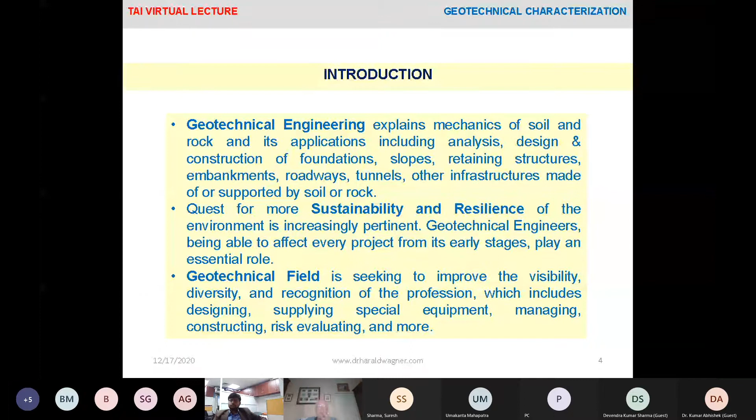The next slide shows some design methods of both soil and rock. There's a table, and I think it doesn't make a lot of sense to go through this table in detail, so I would like to ask you to look into it, as this table gives examples from different methods. In particular, we are talking about empirical methods, closed form analytical methods, and numerical methods. This gives an overview of the effect of time, the effect of groundwater, and the effect of the shape of the tunnel, whether it's a mined tunnel, meaning conventionally excavated, or a tunnel boring machine method tunnel.

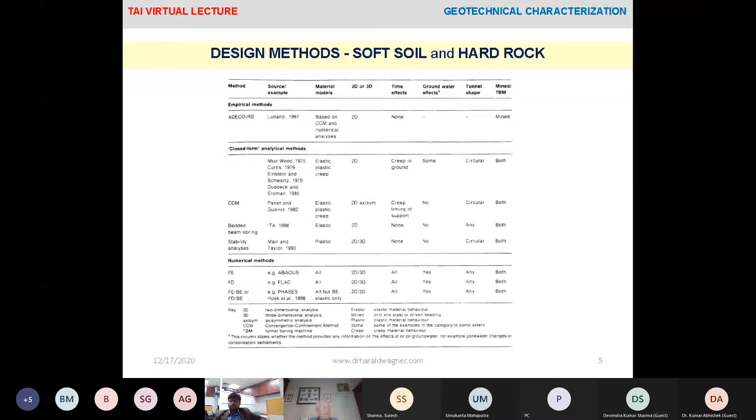After design methods, we will look more at this year's classification of intact rock. Very easy, and very easy to remember, the classification starts with very soft rock, and goes through soft rock and medium to hard rock, to very hard rock, to extremely hard rock. We look at what kind of testing is used, and the range of compressive strengths. We will talk more about compressive strengths, in particular unconfined and uniaxial compressive strengths. This gives a range of compressive strength for these different classified rocks, which starts for the very soft rock with a strength between 1 and 3 megapascal, and then goes up to the extremely hard rock, which is a compressive strength range beyond 200 megapascal.

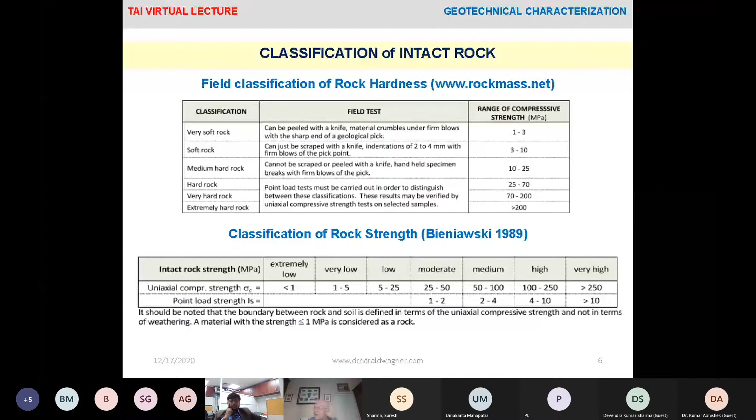The next slide shows the context between intact rock and rock mass properties, where intact rock properties are determined from laboratory tests with regard to porosity, unit weight, specific gravity, water content, durability, abrasion resistance. You maybe remember the Brazilian tests also, for strength and deformability, and rock permeability.

While the rock mass properties are determined in situ. The rock mass property - I cannot see that again, okay. Mr. Uta, maybe you can delete that, but let's just go on.

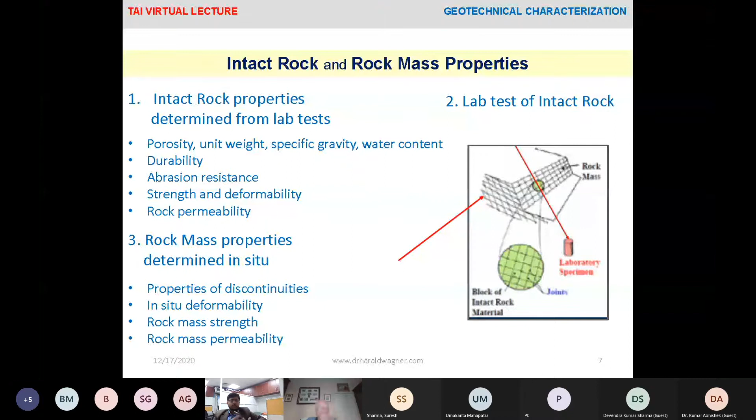The rock mass properties are determined in situ with regard to the properties of discontinuities, the deformability, the rock mass strength, and the rock mass permeability. The sketch shows what kind of laboratory tests we should do when we have intact rock.

So, rock forming minerals and the context of those minerals to the properties. We are looking into minerals such as orthoclase feldspar and plagioclase feldspar, quartz, muscovite, olivine, and so on.

We look at the hardness according to the Mohs scale, which is about 6 for feldspar, and for instance only 2.5 for muscovite. We also look at the fracture behavior: there is good cleavage at right angles for orthoclase feldspar, and nearly at right angles for plagioclase feldspar. For quartz, it is about the same range, but the structure is different - quartz has a hexagonal structure, plagioclase feldspar has a triclinic structure showing distinct cleavage lamellae, and orthoclase feldspar is monoclinic, commonly occurring as crystals.

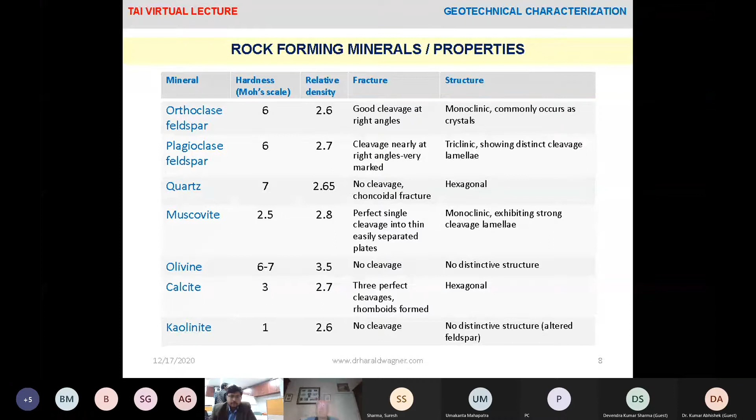So we are talking right now about the physical properties of intact rock. Why is this physical property so important? First of all, because it's an indicator of rock and rock mass behavior. These physical properties are used in the classification and engineering of geologic conditions, and to estimate the mechanical properties by empirical relationship.

We are using the stress state to predict changes in strength and deformability during saturation or drying, as well as freeze-thaw processes. Freeze-thaw occurs in the northern part of India, so we have to look into that different behavior of the properties.

This is responsible for many rock engineering hazards, such as landslides, collapses due to karstic conditions, subsidence, and so on. All that is very important with regard to the properties of the rock.

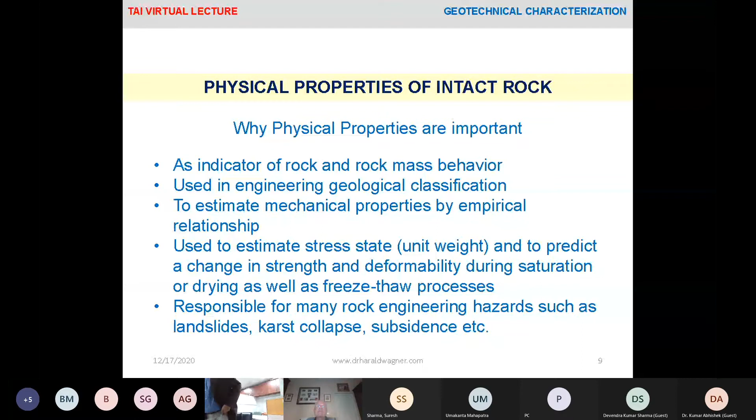Yes, the next slide is on different types of rocks, which we have just been talking about. We have igneous rocks, metamorphic rocks, and sedimentary rocks. This slide shows what kind of rock we have for igneous, metamorphic, and sedimentary. You can also see pictures on the left and right side with samples of these types of rocks.

Also, there is some indication on the unit weight and on the porosity of that rock, which is quite illustrative.

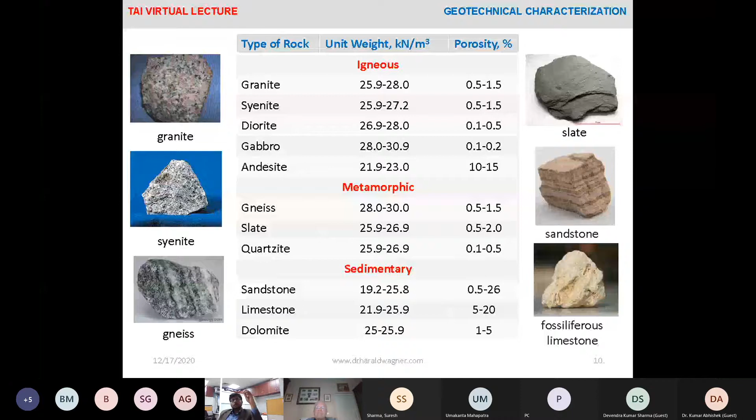Yes, mechanical properties of rock. We are looking into the safety and serviceability of engineering structures, which depend on the stability of the rock foundation or the rock surrounding environment. The rock properties are important for design of engineering structures, including calculations of bearing capacity.

What kind of properties are we looking at? As I mentioned before, we are looking primarily at the uniaxial compressive strength, or unconfined compression strength. We are looking at the triaxial compressive strength, which is more related to soil mechanics than rock mechanics. We do it less in rocks, but more in soils. We are looking at tensile strength, which is quite low. I will show you examples of that on one of the following slides.

We are looking into shear strength, and into the Young's modulus as well as the Poisson ratio. I will give an explanation of what Poisson ratio basically means. We have a lot of influence from Poisson ratios in finite element analysis, which we usually do.

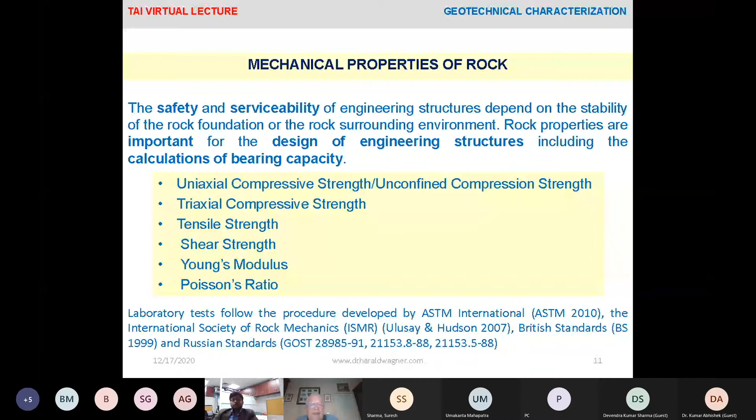The next slide shows that rock, in particular intact rock, is subject to three primary types of stress. One is compressive strength, the other is shear strength, and the next is tensile strength.

Compressive stress decreases the volume of the rock by forces acting inward and directly opposite to each other, while shear stress is caused by two equal forces acting in opposite directions. This is the example of how shear strength is acting, and this is the example of how compressive strength is acting and how tension is acting.

Tensile forces tend to pull a substance apart by outward acting equal opposing forces. So, the strength of intact rock depends on component mineral strengths, and they are bound together by interlocking or even by cementation. Rock failure is generally a shear failure.

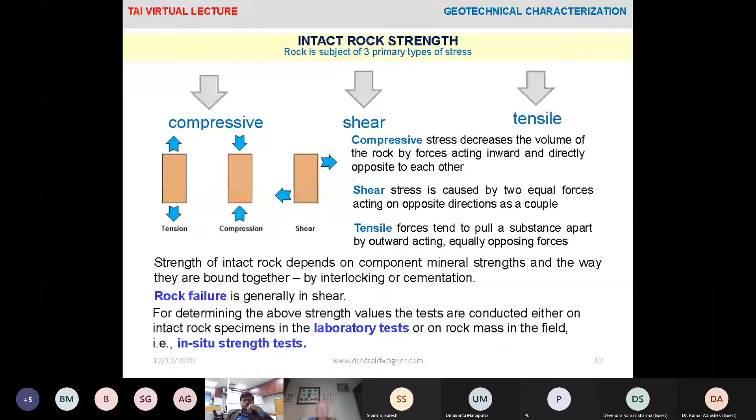The next slide gives more detailed information on the uniaxial compressive strength, or unconfined compression strength. Unconfined compression strength, QU, in short UCS, is strength under uniaxial load in an unconfined state. Unconfined compressive strength of dry rock is standard for defining rock strength. Unconfined compressive strength of saturated rock is lower than that of dry rock.

The slide also gives examples of unconfined compressive strengths, starting with very strong rock, going through all stages from very strong to moderately strong and so on, until very soft soil, giving some indication of the unconfined compressive strength in megapascals for each of these different rock or soil descriptions.

On the right side, you can see a diagram of strength and deformability of igneous rocks according to Deere and Miller from literature in 1966. In 1976 or about that, I worked with Don Deere in the United States on the Washington Metro, just as a side comment.

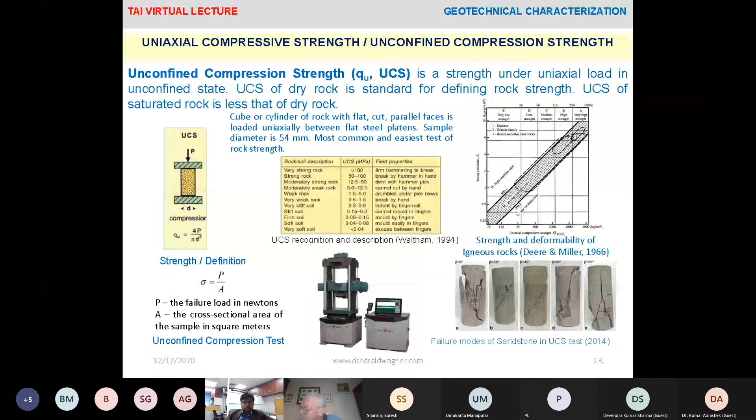The next slide gives, according to Deere and Miller, the engineering classification of intact rock in classes from A, B, C, D, E, from very high to very low level of strength, whereas the unconfined compressive strength in megapascal for the very high is above 200 or 220 megapascal, and it decreases down to the very low level, about 10% of the very high, or 20. This is an indication of 27.5 megapascal.

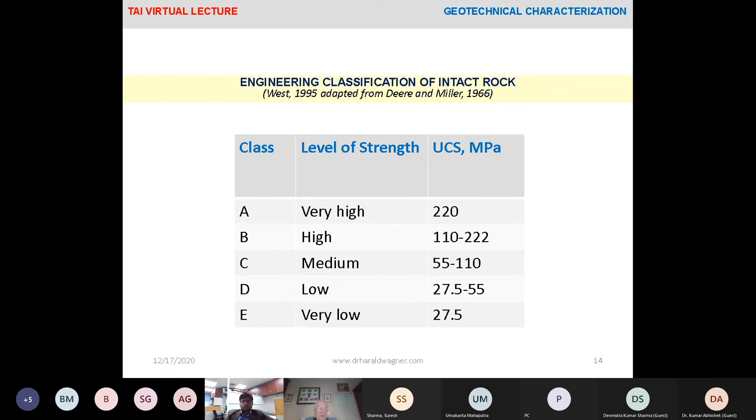Okay, we can go to the next slide, please. Slide number 15. So the triaxial compressive strength is measured when the rock sample is confined, rock sample or soil sample.

The strength increases with an increase in confining stress, and the strength is rarely measured in rocks, but more important for soil. As I mentioned before, rock strength greatly increases when it's confined underground. When unconfined, it decreases immediately. Confined triaxial strength is rarely measured in rock, as it is more common and more important in soils.

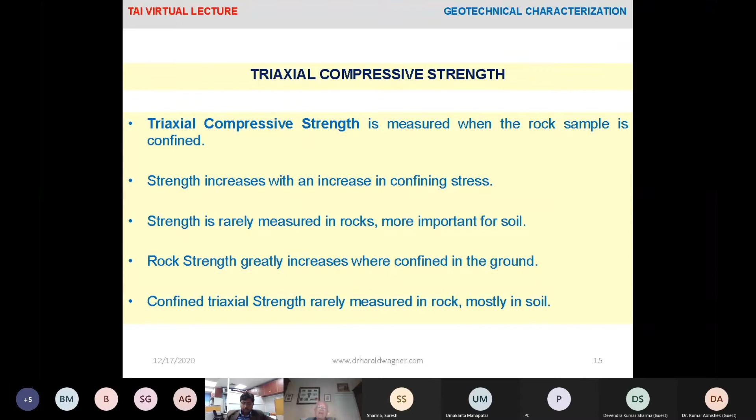Can go to the next slide, please. Slide number 16, yes. So we've all learned, either in university or later in daily practice, what the Mohr diagram is and what it means, particularly for rock. The Mohr diagram is a shear stress versus normal stress diagram, used to determine the strength and the failure relationship.

Triaxial compression tests are performed on rock samples to determine how the rock will behave under different confining pressures. So the intact rock shows shear strength at zero normal stress, called cohesion. A cohesion-less discontinuity is shown in fault zones, and it does not show any shear strength at zero normal stress, or no cohesion.

If you look at the diagram, on the left side you can see the sample with the sigma 3 and sigma 1 stresses, vertical and horizontal. Here you also have the Mohr circle, sigma 1 and sigma 3, and this is the uniaxial compressive strength. If we have the triaxial compressive strength, we can also get the failure criteria by drawing the line as a tangent between A and B, giving us the cohesion.

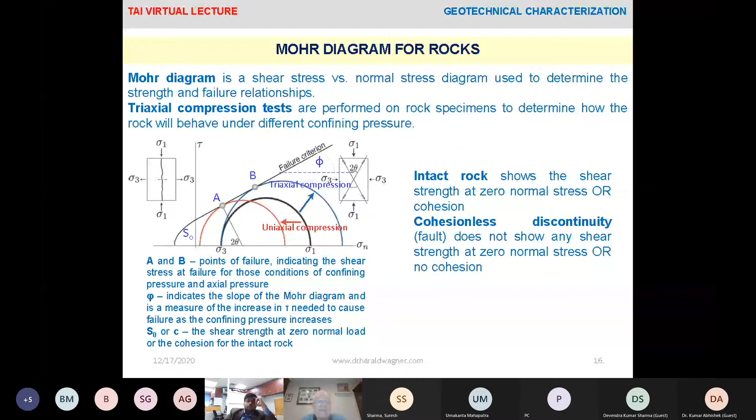So this shows the indication of vertical and horizontal stresses. Just let me put on my light in my office. Okay, so this explains the Mohr diagram for rocks, and we can go to the next slide, number 17.

Number 17 explains the tensile strength of rock, which is very low. The tensile strength is rarely measured or applied directly. Tensile strength of rock is generally about unconfined compressive strength between 20 and 8.

The sample also shows the so-called Brazilian test. The Brazilian test for rock stability—the tensile strength is not as significant a parameter as the unconfined compressive strength, but it is still done in practical geotechnical baseline reports. You can always find indications for the Brazilian tests, and it gives some parameters.

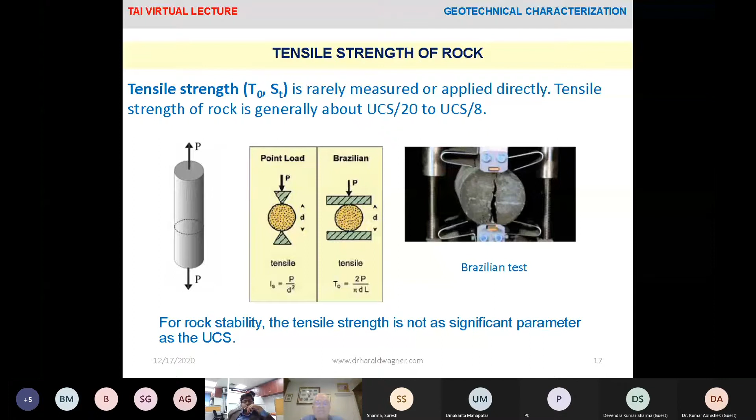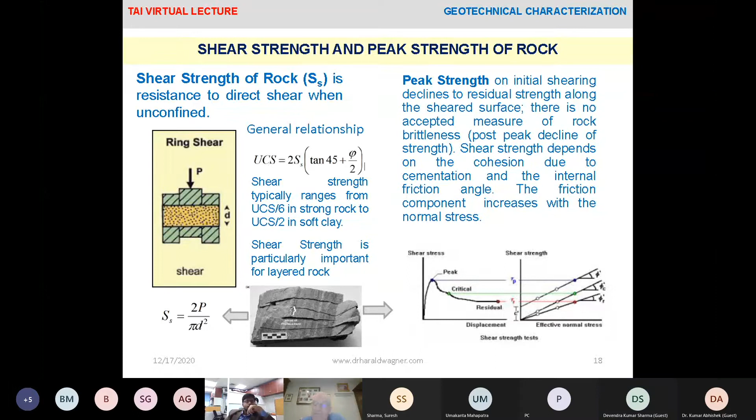So the shear strength is particularly important for layered rock. We also have two examples on the right side, two diagrams for shear stress and shear strength, and the relation between these strength measurements. Next slide, please.

Slide number 19 explains rock mass characterization, which is the subject of today's presentation. The rock mass is a matrix consisting of rock material and rock discontinuities, characterized and classified to determine the rock mass characteristics by assigning values to a set of rock parameters.

This makes rock mass and rock mass matrix really challenging, because the rock itself does not determine the condition much—it is more determined by the discontinuities. The behavior of intact rock material is determined by continuum mechanics, whereas rock masses are highly fractured. Fractures control the mechanical response of rock masses, making determination of mechanical behavior difficult, and so dependent on experience and on specialists or rock mechanics experts.

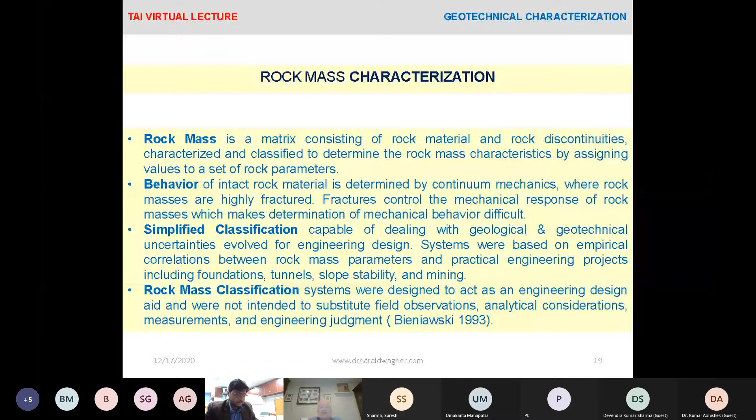Slide number 20 deals with parameters for rock mass classifications. The overall behavior of rock mass, both engineering properties of rock material and the fractures, should be derived considering the following parameters. These are significant parameters used in classification systems, whatever the classification system may be, because we have several classification systems.

These parameters relate to the strength and deformability of intact rock. They also relate to the rock quality designation, or RQD, considering the intensity of fracturing in a drill core. We have to make a drill core and then we can derive a rock quality designation. The rock fracture parameters also relate to spacing, orientation, width of the fractures, roughness, weathering conditions, and so on.

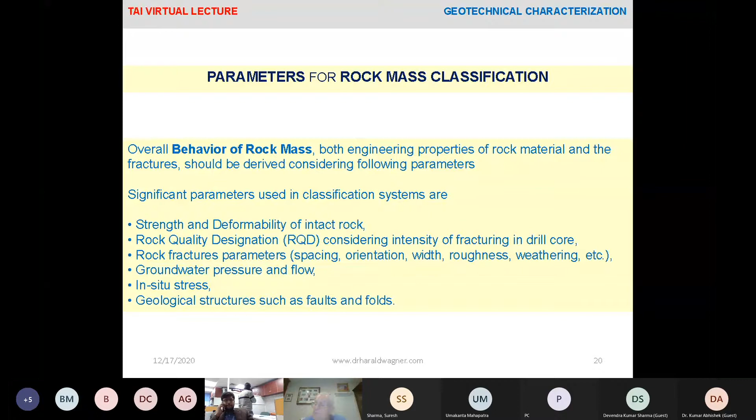But other significant parameters relate to groundwater, groundwater pressure, and groundwater flow, as well as in situ stress and geological structures, in particular with regard to geological fault zones and folds and the like. So the next slide, please.

Slide number 21. With regard to rock mass classifications, we have to look into what kind of rock mass classifications assist us when we design infrastructure, any kind of underground infrastructure.

The rock load classification evaluates the impact of rock load, for instance on steel-supported tunnels, based on a descriptive classification of rock classes, developed by Terzaghi, one of the very early classifications in 1946. So we look into the time immediately after the Second World War. Terzaghi was lecturing as a teacher at the Massachusetts Institute of Technology, MIT, in Boston, Massachusetts. He was the one who did the first classification with regard to what was common technology at that time in the United States, which was tunnels supported by steel arches. With that regard, Terzaghi made a classification system.

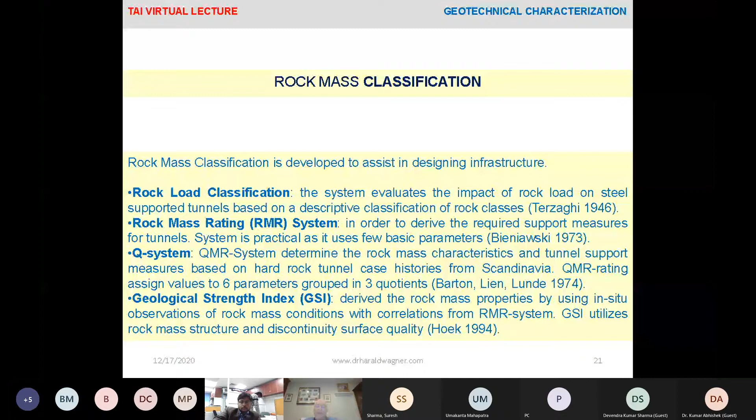And then we have the GSI, or Geological Strength Index, which derived the rock mass properties by using in situ observations of rock mass conditions with correlations from the RMR system of Bieniawski. GSI utilizes rock mass structure and discontinuity surface quality, and this was further developed from Bieniawski by Evert Hoek in 1994. I've been working with Evert Hoek in Turkey in 2005, I believe, 2005, 2006.

Let's talk a little bit about engineering properties and unconfined compressive strength, or UCS. UCS is known as uniaxial compressive strength, and this is the maximum stress a rock sample can carry under uniaxial or unconfined compression. It is conducted on a prepared cylindrical rock sample with dimensions of length equal to 2 times the diameter.

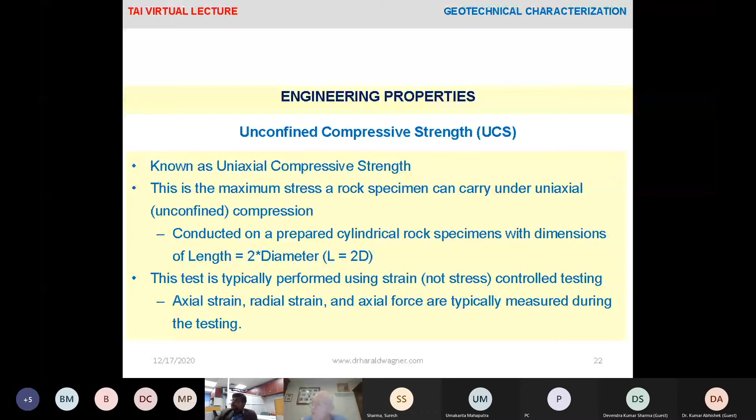The test is typically performed using strain, not stress, controlled testing. Axial strain, radial strain, and axial force are typically measured during the testing. We have seen that testing apparatus in one of the slides before. Let's go to slide number 23. Yes, slide number 23.

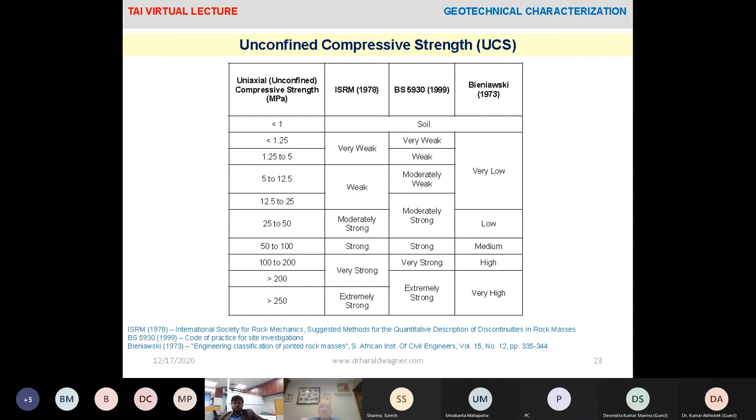And we have the African Institute of Engineers, who published something in 1973 also, I believe. Okay, so we can go to the next slide, slide number 24, please.

Rock has a history, yes, but what is the history of it? It is the history of a building material. There are numerous examples of ancient people building into rock, for example temples like the Kailasanath temple, tombs such as the Lycian rock tombs, and natural excavations in Cappadocia in central Turkey. There are also quarries, quarrying rock for structures and megalithic structures, for instance the ancient pyramids in Egypt, a very famous example, but also Stonehenge in the United Kingdom, and Tiwanaku in South America.

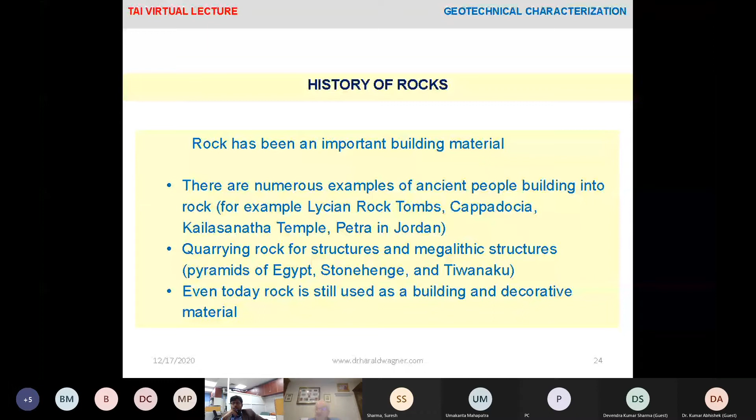So even today, rock is still used as a building and decorative material, sometimes only as a facade. So we go to the next slide, slide number 25.

We have different types and formation of rocks. In particular, we have intrusive igneous rocks and extrusive igneous rocks. Intrusive igneous rock comes from molten rock, also sometimes called magma, which is cooled down and crystallized within the earth. Extrusive rock, also molten, its origin is called lava, and it is cooled and crystallized on the surface of the earth. A common intrusive igneous rock type is granite, and extrusive igneous rock type is called basalt.

So please switch to the next slide. In more detail, metamorphic rock is formed from other rocks by essentially solid state changes in mineralogy and/or texture, as a result of a change in chemical or physical environment. Different temperature and pressure influence that. The common metamorphic rock types are slate, schist, and gneiss.

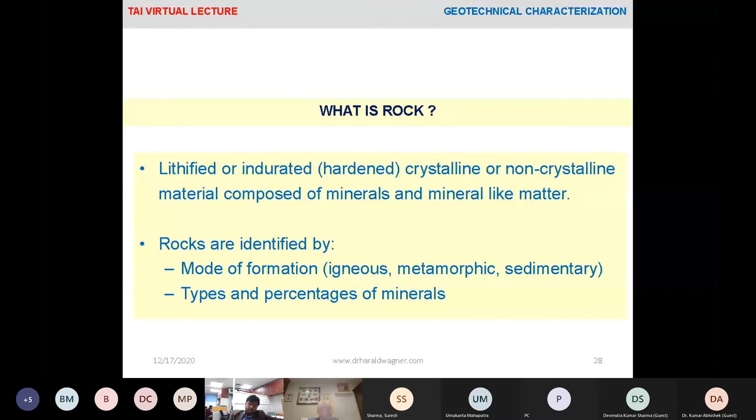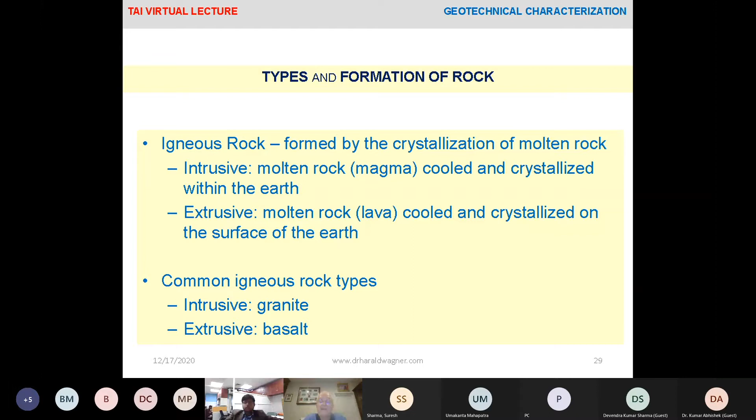Types and formation of rock, intrusive and extrusive rock. We have been talking about crystallization of molten rock and the different types of intrusive and extrusive rock, magma and lava cooled down. We have been touching on this issue already. I think that is fine. We can go to the next slide, number 30.

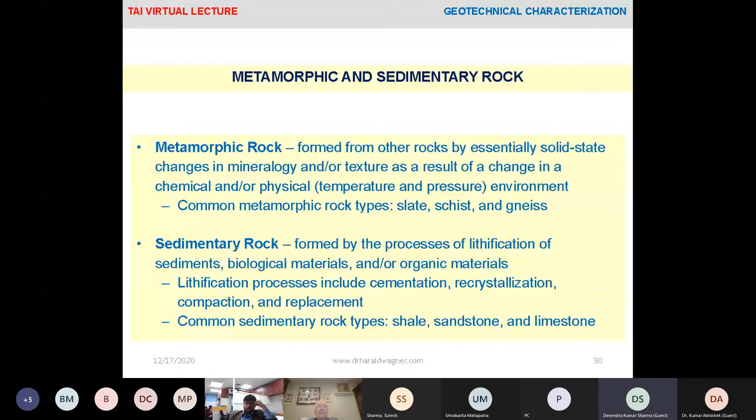Next slide, please, 31. I think there was some confusion. 31. I'm trying to follow up.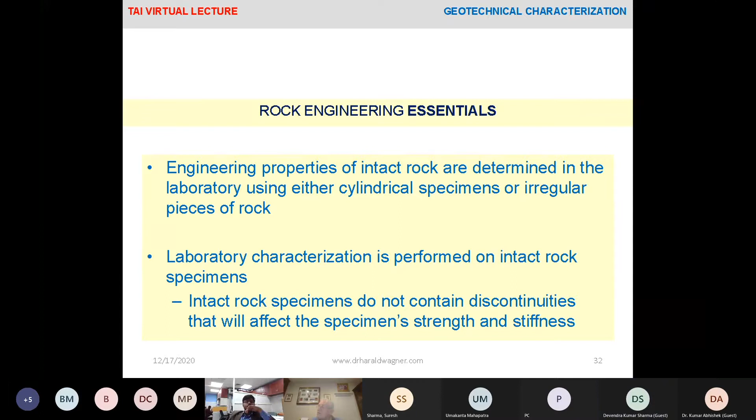We can go on to slide number 33, on rock engineering and mixed rock engineering. Here we can see mixed face conditions according to a publication by Ed Cording in 1987. That was an example I dealt with at the Washington Metro when I worked with Professor Cording at that time. It shows a TBM-driven tunnel, TBM-driven and segmental lined tunnel here.

We have a transition from sand to hard clay, and you can see here this is a transition area where we have a mixed face condition. When we are in the hard clay, we are again in conditions which are quite different from the conditions in the sand.

There's another example on the right side of the same slide. If you look at the tunnel boring machine here, we have fissured rock, and in the fissured rock we have a shear zone. So when the tunnel boring machine encounters the shear zone, we have changing conditions where advance into the shear zone or faulted zone creates quite different conditions.

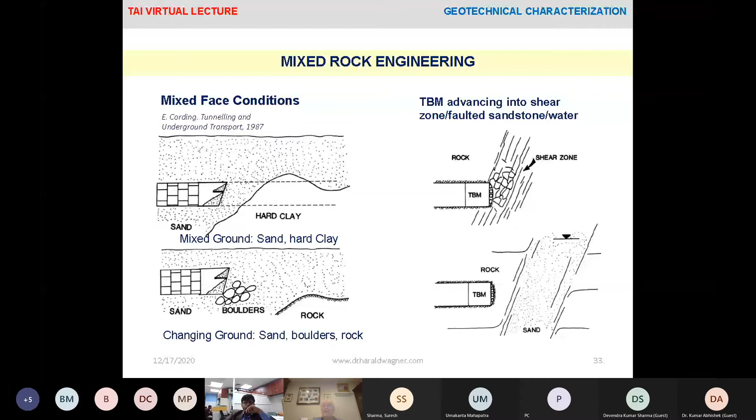Next slide please, slide number 34. This should be the slide on rock mass versus intact rock. Yes, rock mass versus intact rock, where the rock appears in nature as a rock mass basically, and you can see here this very illustrative picture.

The rock mass is divided into blocks by discontinuities, and rock mass properties are controlled by this type of discontinuity, for instance bedding planes, joints, faults, and so on. The intact rock samples are obtained from within rock blocks by coring operations. The intact rock is typically stronger and stiffer than the rock mass from which it was obtained when unconfined. This always makes a big, very important difference between the rock mass and the intact rock.

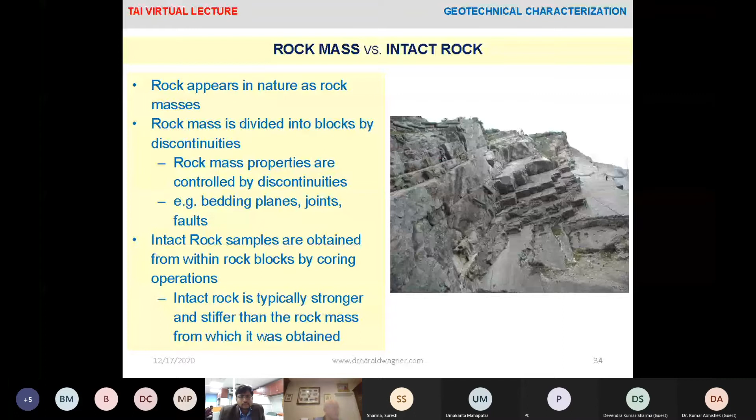Let's go to the next slide, number 35. This slide shows classification systems, an overview of principal systems of rock classification. This has been published by a Japanese engineer named Tatiya in 2005 on civil excavations and tunneling.

The first classification system on this table is the classification according to Terzaghi, on classification of rock loads, in particular for tunneling with steel support. Then we have rock quality designation, RQD. We have talked about this also, but this gives a better overview of different classification systems. In this case we are talking about RQD.

RQD, according to Deere, has a very easy, very simple classification: excellent RQD values between 90 and 100, good, fair, poor, and very poor conditions, where very poor conditions are lower than 25 percent in the RQD classification system.

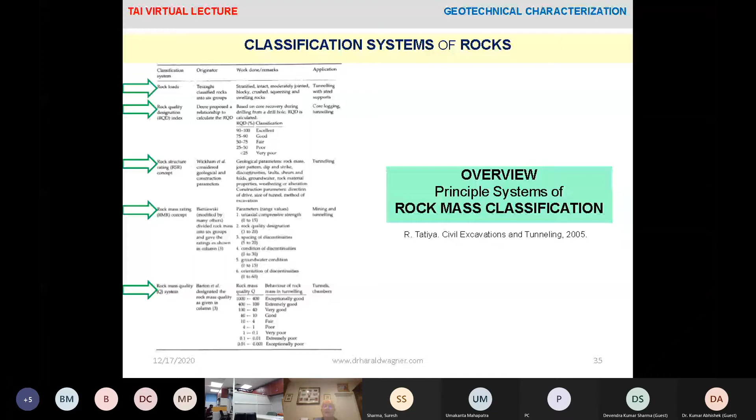This table, I would recommend you take a little bit more into detail. I think it makes no sense to talk more about that table because it has to be considered separately. Let's go to the next slide, slide number 36.

Slide number 36 is the slide on the design process of rock. According to the ITA, International Tunneling Underground Space Association, when we start the design for a project dealing with rock, we first go into site investigation in order to get a clear picture of the geology. After we have a good picture of the geology, we go into geotechnical investigation to determine the ground characteristics, and from there we use our information and experience to make the best choice for the excavation method.

We relate the excavation method to the structural elements we use, either cast in place concrete, shotcrete, or precast concrete segments. Then in the design we go to the mechanical model, the statical or structural system, and statical analysis. Then we go to the safety concept and possible failure hypothesis, which is a criteria in the design, and from that criteria we continue to either yes or no.

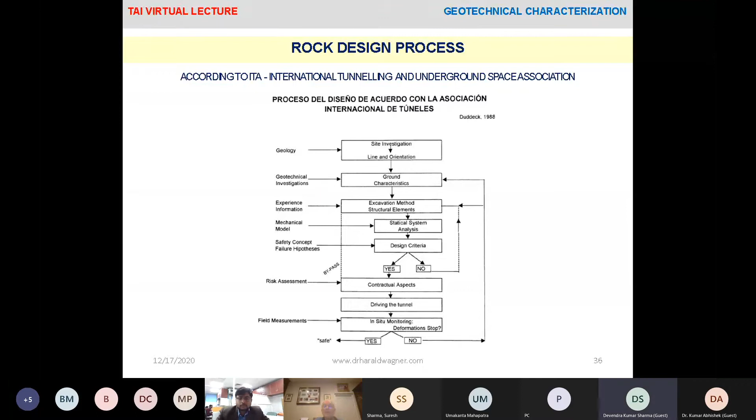Okay, so let's go to the next slide.

Still I cannot see, Mr. Uttam, I cannot see what is on the slide because it's covered. If you can uncover it, that would be very good. Otherwise, let's go to the next slide, please. I don't know what you can do. Hang up or go to the next slide, slide number 38.

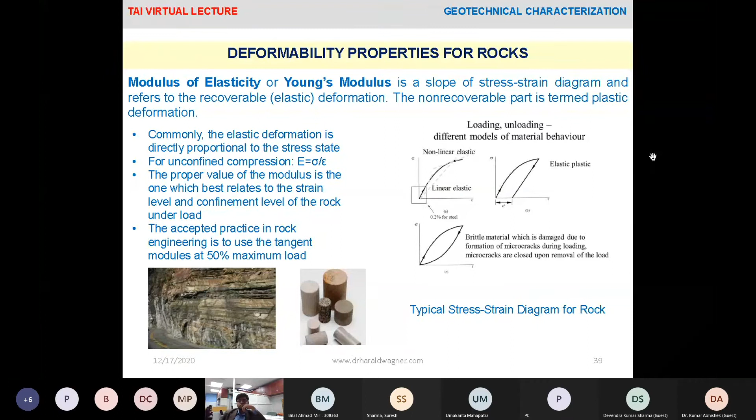So you can see here the loading and unloading of different models of material: this is a linear elastic material, this is a plastic material, and this is a brittle material which is damaged due to the formation of microcracks during loading. Microcracks are closed upon removal of the load. In the picture, you should see some of the samples which have been used to determine this type of diagram, though I cannot see it myself.

Okay, so the next slide—we have seen that deformability. The next slide is the Young's modulus of elasticity, or elastic modulus. There are different values for elasticity, for metamorphic rock and for sedimentary rock. You can see here the metamorphic rock conditions for different classifications, with very low strengths and very high strengths, and here we have the Young's modulus of elasticity.

Same here, but for sedimentary rock, with different types of classification: A, B, C, D, E, from very low strengths to very high strengths. These values allow comparison between sedimentary rocks and metamorphic rocks. We can go to the next slide, please.

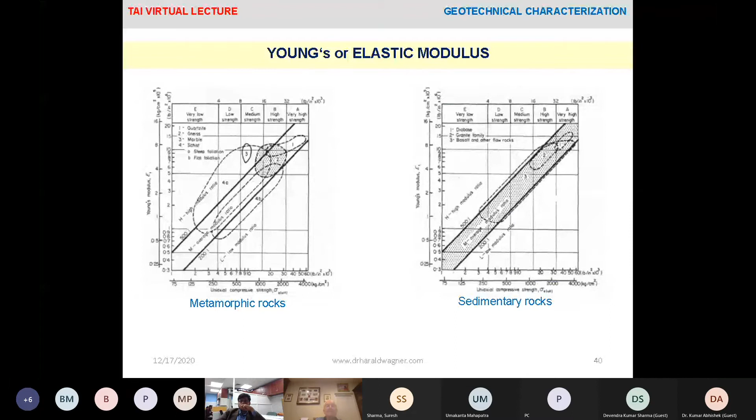The next slide is talking about the Poisson ratio, which is also a very important rock property. Poisson ratio is a mechanical property involved with relating the lateral strain to the longitudinal strain. It is usually used in numerical stress analysis for the unconfined compression strength test. The Poisson ratio is the ratio of the lateral extension expressed as a fraction of the longitudinal strain. This is an interesting and very important value. It has significant influence on the deformability, the deformation behavior, and the stability of the rock.

You can see here on this slide different types of rock: andesite and basalt, and different types of dolomite, gneiss, granite, and so on. On the left side, you can see how the Poisson ratio is defined. It's defined as the quotient of the lateral strain and the longitudinal strain.

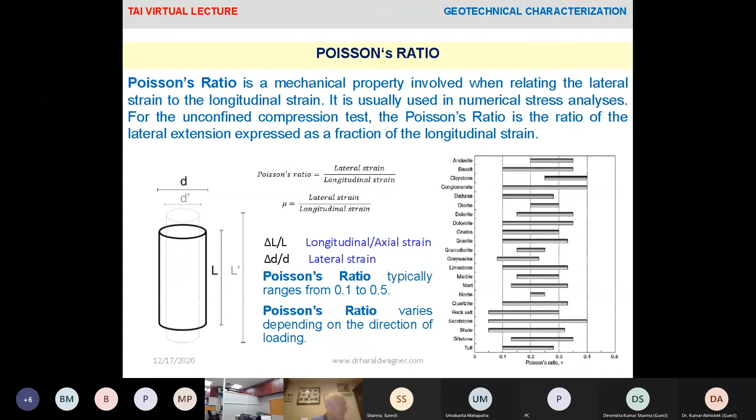Okay, so that was the Poisson ratio for different types of rocks. We can go to the next slide, please.

The next slide gives us the physical and mechanical properties of unweathered rock. The rock types are listed here, starting with granite, sandstone, different types of sandstone, limestone, shale, and so on. The parameters shown are density, dry density, porosity, dry unconfined compressive strength, mean unconfined compressive strength in megapascal, unconfined saturated compressive strength, modulus of elasticity, strength, angle of internal friction, and cohesion.

These are different values for different types of rock on this slide, for your orientation, so that you can get some indications of what is shown or used in the design of underground infrastructure. You can go to the next slide, please.

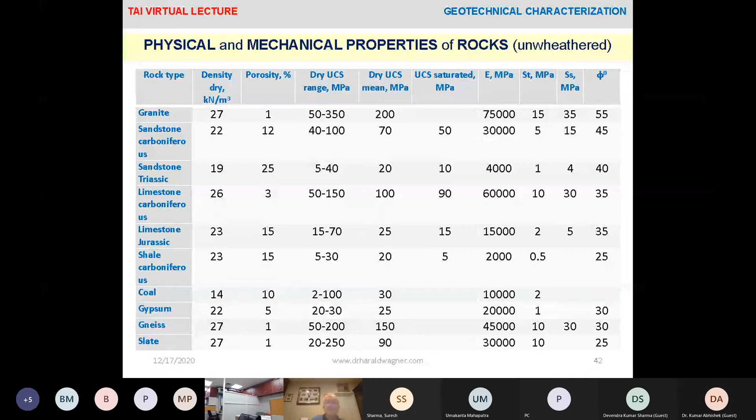Slide number 43 should be another classification. Ah, now I have the full picture again. Very good. Now not, now it disappeared again. I don't know what happens that it disappears, but now I have the full picture again. No, disappeared again. I don't know whether you can make it, but you seem to be in the right direction to give me the full picture of the slide on my computer.

There should be one or two more slides. Classification of the Korean granite, a very well investigated rock, with grade types from 1 to 6: from completely fresh rock to slightly weathered, moderately weathered, highly weathered, completely weathered, and residual soil.

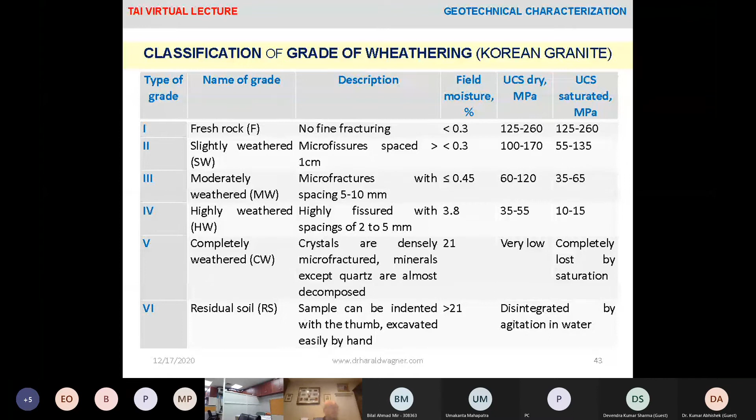The next slide, I'm not sure if it's the last one or if there's one more. Now I can see my picture on my laptop again, full. Okay, now it's disappeared again.

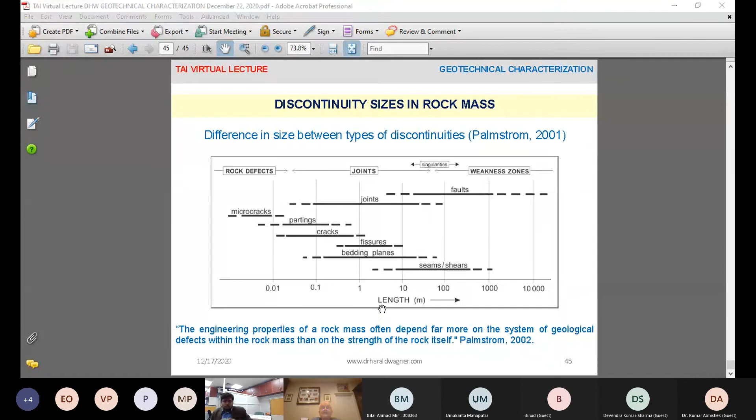But as we still have a little bit of time, I would be very glad and honored if you have some more questions. So please let me know your questions either right now, or if you write them down, send them through the Tunneling Association of India or through the Central Board of Irrigation and Power. I will be happy to respond in writing also.

So for that moment, I appreciate having this lecture at the end of the year almost, which was quite a difficult year, but as engineers, we could show that we can master difficulties by inventing new solutions, new processes, innovative communication systems, and I think it has been really great to be with you today. So I would like to thank all of you for your attention, and I appreciate if you have further questions.